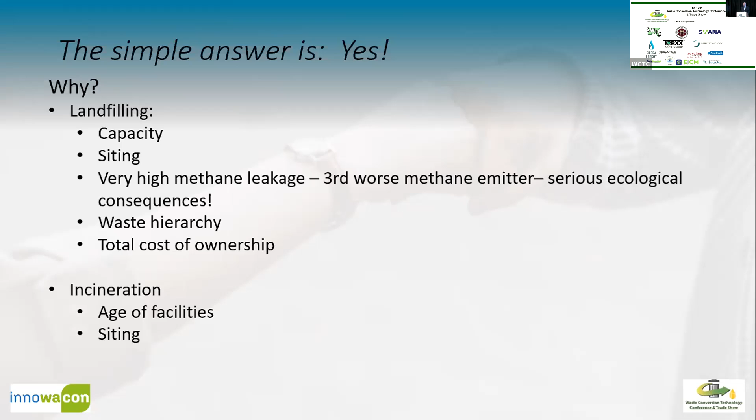Waste hierarchy, it's also down low, just above landfilling. And maybe, of course, no one wants a large stack in their backyard. I can understand that. The people in Baltimore have said, we don't want this polluter there. That's getting very subjective, finding out what's going on. People are complaining they're getting cancer. Maybe so from this, I don't know. I don't know all the facts. But if you have a polluter in there emitting a lot of things, why not get rid of it as well?

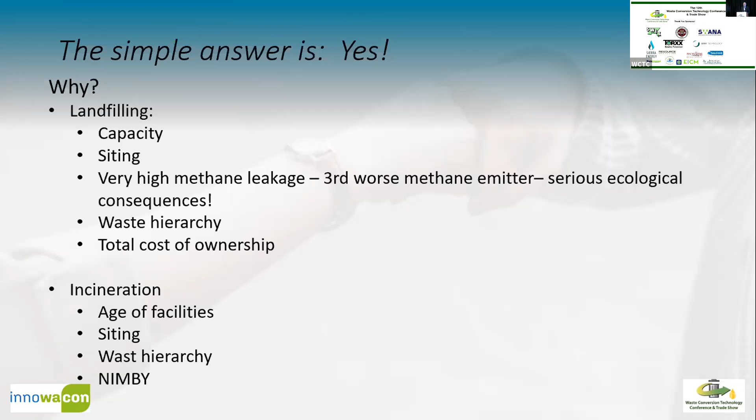If you want to try and find a tried and proven alternative out there, you have to also answer these further questions. What current sustainable, future-oriented waste treatment and recycling practice and methods are being used now? What kind of technology is available out there? And what do I do with my organics and garbage?

Okay, organics, garbage, nice juicy waste stuff. Of course, diverted from landfill. You can bring it to AD. There's some troubles in that too. We also have AD. InnoWaCon also has AD technology.

What can be landfilled? What material can be landfilled? Maybe take a look at what Germany did. And what complementary technologies can be used are available there for use. These questions have to be thoroughly addressed to come to a complete answer.

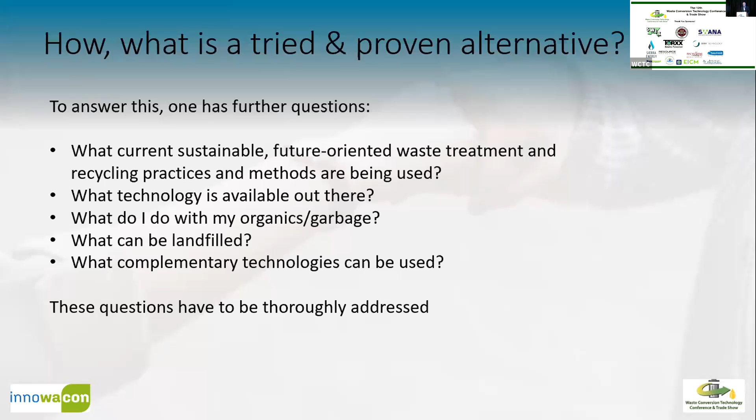Ideally, the complete solution is combining the waste collection, waste and recycling methods and centers that you have around. Just don't have a collector or a hauler out there bringing stuff to facility A, not working together or working with the community together with a hauler, with a recycling center. If you can work together, you have much better cost control of things, and things can work much more efficiently.

You have to have a sustainable waste treatment process itself out there, one that's really going to work and work for a long time. And all the products, the waste that comes off of this, you have to be able to utilize and recycle them if possible, and incorporate the complementary technologies where appropriate. Don't have to have a whole big thing that'll do everything from A to Z, but the appropriate things for your area. And it should be BAT.

Everyone know BAT? BAT means best available technology. I believe people very often say state of the art and also BAT, but I believe they're two different things. State of the art, if you look at a timeline going out into the future, state of the art, let's say it's right there. Time goes on and state of the art is still there. BAT, best available technology, makes iterations. It goes along with time. It's always improving itself and making itself better over time. So it's always looking at new things, questioning if it's still viable and workable.

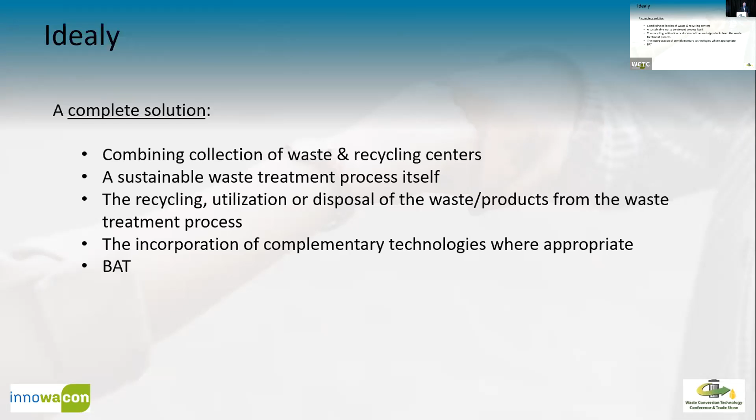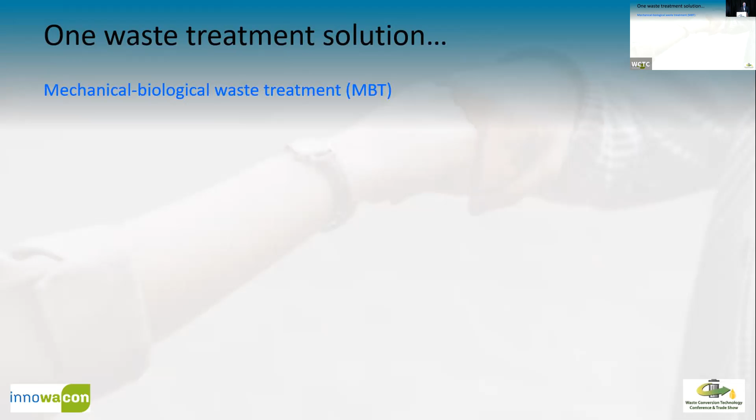One waste treatment solution that we've had is the mechanical biological waste treatment process, MBT. That exists, but they've had their own challenges and difficulties in the past. It's been shunned, yes, for some probably very good reasons. They have not addressed all the concerns that I've listed above in the last slides very often. They weren't complete systems. So I have an MBT that can do this, but it can't take everything else. But it'll do the job. We've seen that. It's difficult to control and maintain.

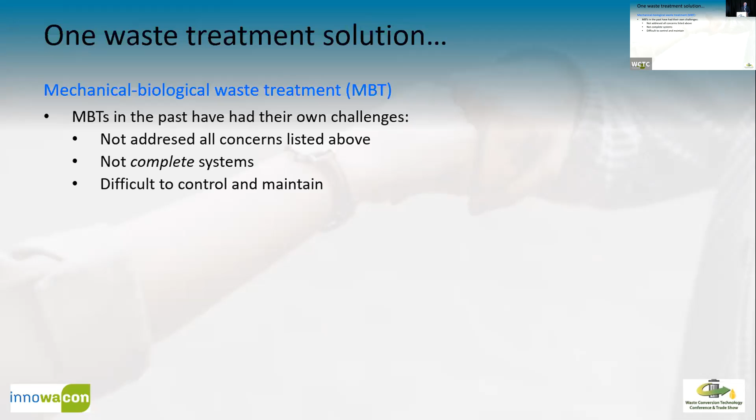There were 2 plants built in Heilbronn and Buchen in Germany with an MBT process that promised to do well and work correctly. It didn't work at all. In fact, they tried to keep the process going. Pipes were getting clogged up, all sorts of troubles. They had to take these 2 MBTs completely down, demolish them, because this process did not work at the time. And that is a major thing with the MBTs, because it's a mechanical, biological, thermal, chemical process that has to work together.

They were in the past designed and built just enough to do the job, maybe not much more. And they didn't extract the maximum energy and value out of the waste as possible. Not sustainable, couldn't keep it going. And this resulted in unreliable plants. You just couldn't keep them running. Non-availability. You want a plant that you put a lot of money into to keep on running 24/7 or whatever your shift, and these weren't doing that.

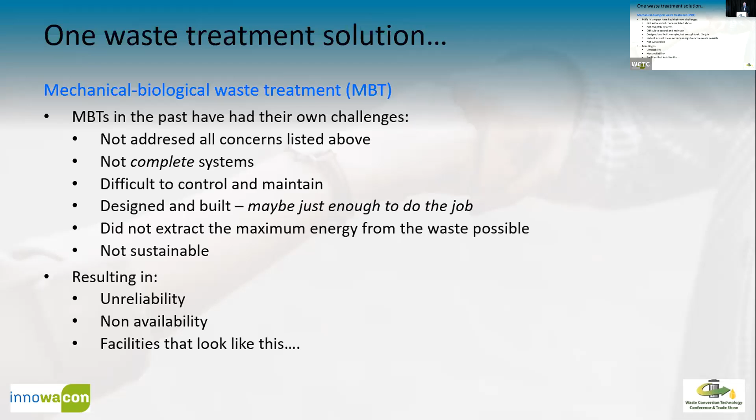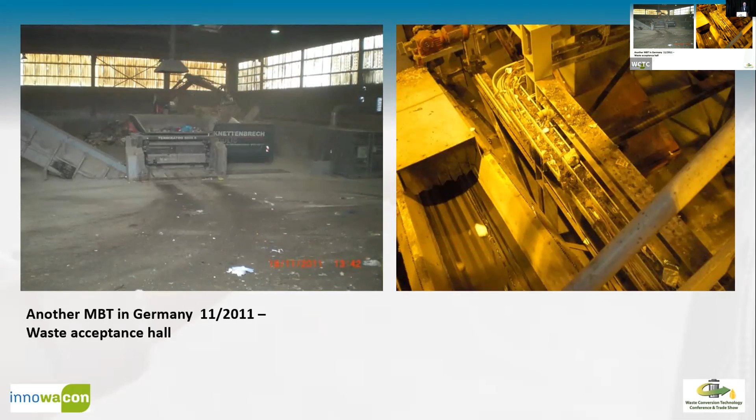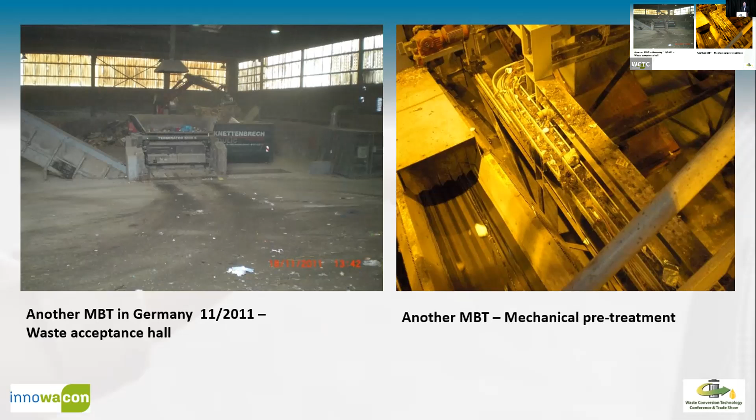On the right side picture, you're seeing the mechanical pre-treatment side of things with a transport belt on the lower left, and open cable canals, cable troughs, where dust and whatever is flying inside of them. OSHA and safety and fire safety, they're going to love this one, because that's an accident waiting for a place to happen.

Let's see if this thing works. Oh, let's go back one.

And I've seen people in similar tunnels like this, loading and unloading these tunnels. That guy was not a happy camper. He was doing it with a small front end loader, full gas mask. Because of that, he was hot and sweaty, and he wasn't happy, and he was very happy to finish shift and get home. I'm sure they have a big turnover of people there.

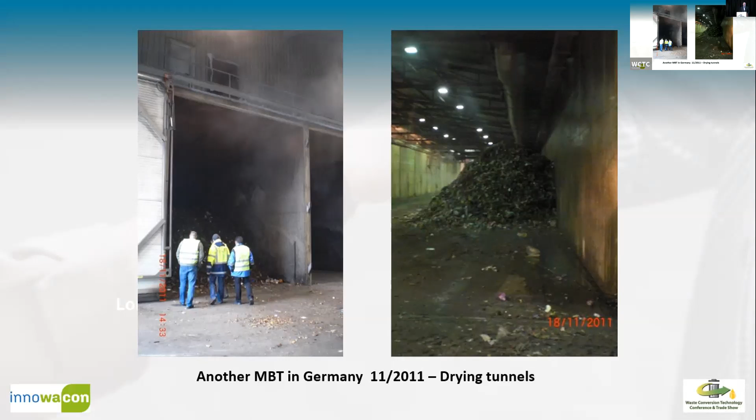The other one is also a drying area, putting the stuff away out there to dry in a pile. That's a fire hazard out there.

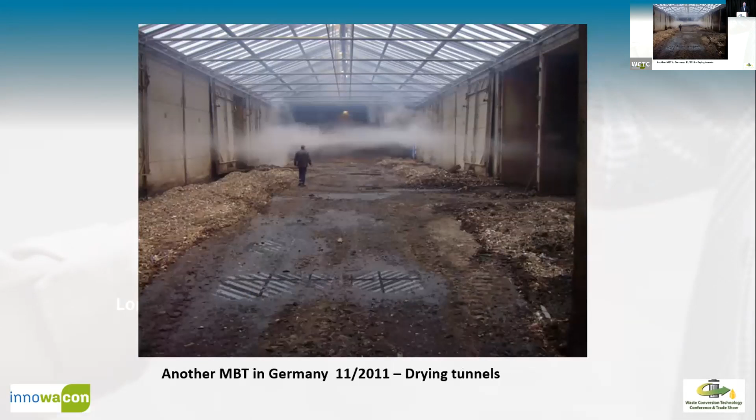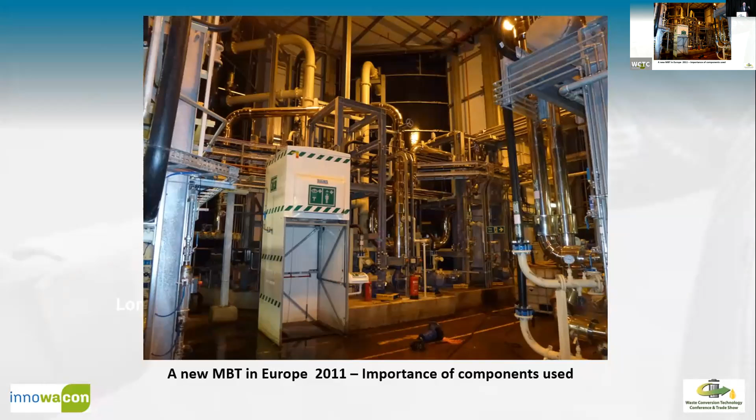Open composting with the smells. We don't have to talk about that because we've talked about that in the last couple of days.

These problems were addressed and has resulted in MYT, maximum yield technology. This is an MBT technology that has really addressed all these problems and come up with something that is sustainable. It is tried and proven.

The pictures you will see shortly are from a plant in Germany that started in 2006, ramped up from May to August 2006, taking in 100,000 tons a year, has had no downtime since then, is still operating, and they plan to go another 20 years on it. The floors inside are as clean as the floor in this room right now, except in hall 1 where the waste comes in. You'll see that in a minute.

It is a fully developed system, answering all the questions, what do we need? It is also flexible. Flexible, I mean, it is adjusted to the waste that's to come to it.

For example, this little pointer here is a product, has a certain size, certain weight, can do certain things, a few buttons, fine. The MYT is a process that is flexible to the kind of waste that you have. So it's not just, oh, we just need that, that, and that. Rather, it can take the different ones. You just have to know what kind of waste you want to bring to it.

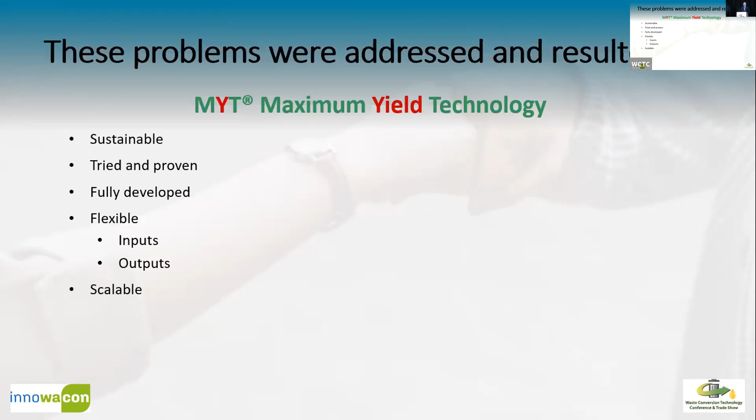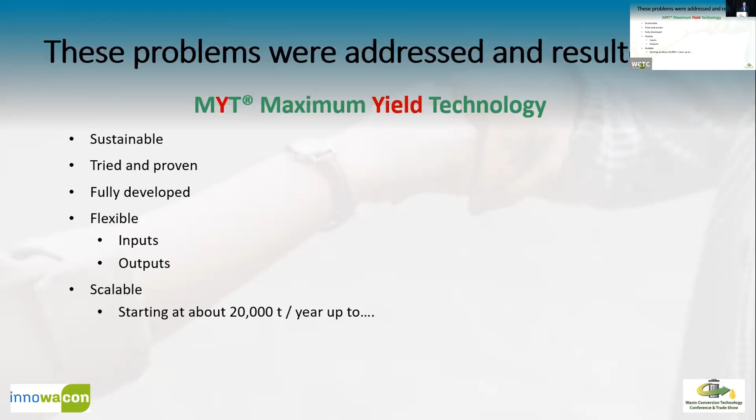It's also scalable. The minimum size is around 20,000 tons a year, and yes, we will come up to the number we heard yesterday, 300,000 tons a year is no trouble. 500, whatever you like, it can be expanded. At some point, there's economies of scale that with such a large plant, it might make sense to split it and have two plants around a city, large municipality. So in case of some problems, there's always some redundancy somewhere. Make sense of the whole thing.

It is a German technology, yes. It's available in North America now. We can have it, it can be brought over. Not the equipment, except for one piece essentially, but a lot can be bought locally, be it in US or Canada, it doesn't matter. The companies that supply pumps, material, transport belts can be qualified and bought here locally, which makes a lot of sense. Buy USA, buy in Canada, good idea.

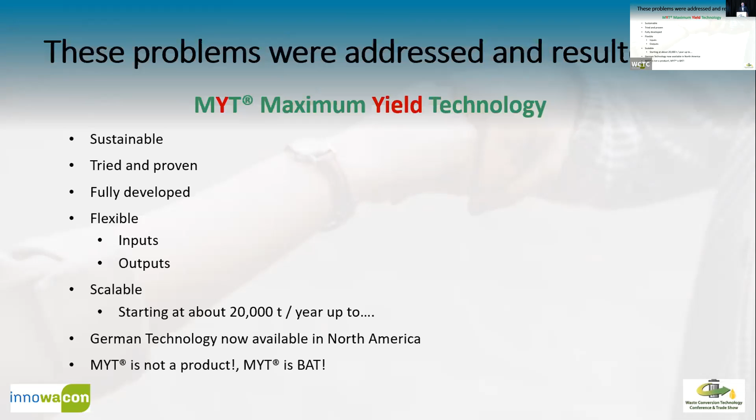MYT is not a product. MYT is BAT, best available technology now.

Let's go through the process steps. We have waste acceptance, mechanical preparation, generally 5 steps: biological conversion, biological drying step, mechanical material separation.

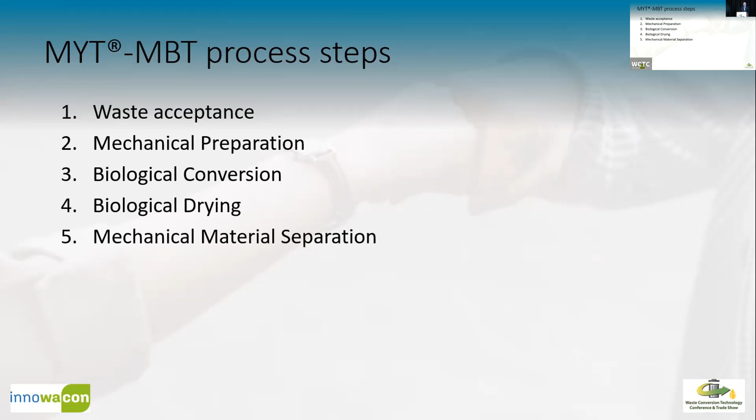Let's look at each of these in a little bit of detail. How am I doing on time?

Going from left to right, waste acceptance, where it comes in, and they first start to find out what I don't want into my system. People have been known to put everything just perfectly into the waste bins, into the bio bin as well, right? No. We found motor blocks, everything, guns, big stones, who knows what, everything can be found in the waste.

And they take out the big stuff in this section right here. Then the waste that we want goes along onto a transport belt, all enclosed. Why? We suction that air out of the enclosure. Also, the building's under negative pressure, so germs and dust and smells don't go out, rather fresh air comes in.

Enclosed as well, we suction it out, so germs, animals, let's say birds - if you have different buildings, you will see we do have different buildings on the ZAK plant in Germany. Birds, animals don't come in, and also smells and dust does not come out.

The rest of that good waste that we want goes into the mechanical pre-treatment section, where we take out different fuels, mostly RDF, a lot of plastics. And we know what we can do with plastics - we've talked about that in the last days. Minerals, meaning stone, sand, rocks, metals, and residual materials.

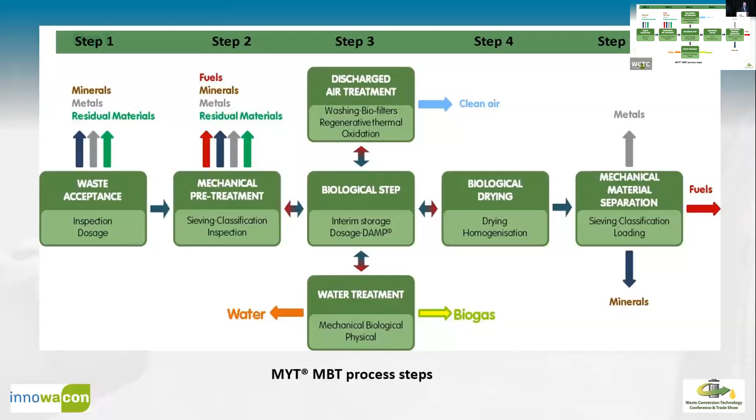Let's look at some of the inputs I mentioned about flexibility. If you look at all of Germany, this large box is the way they do it there. It was talked about yesterday whether recycling is really correct or not. Mike was very adamant about it, Mike Hart, talking about these things.

In Germany, you'll have the gray bin, the organics bin or bio bin, with your nice juicy kitchen waste. You'll have the yellow sack where recyclable materials go, all your cartons, your yogurt tins, your yogurt plastic things, the hard plastics as well.

They don't sort by 1 through 7s. They don't have that in Germany. They sort by PP, PE, etc.

There's a paper bin, very interesting, about a 240 liter paper bin. It gets picked up every 3 weeks, and the paper company gets fairly good quality paper so they can make new paper, new cardboard out of it, used paper.

In town you'll also find a glass bin where you can put your wine bottles and other recyclable bottles that you don't reuse. There's also a lot of reusable bottles in Germany. Maybe we can get back to that. Who remembers in the States the beer bottles from Schlitz or Pabst, where pints come in and they're reusable?

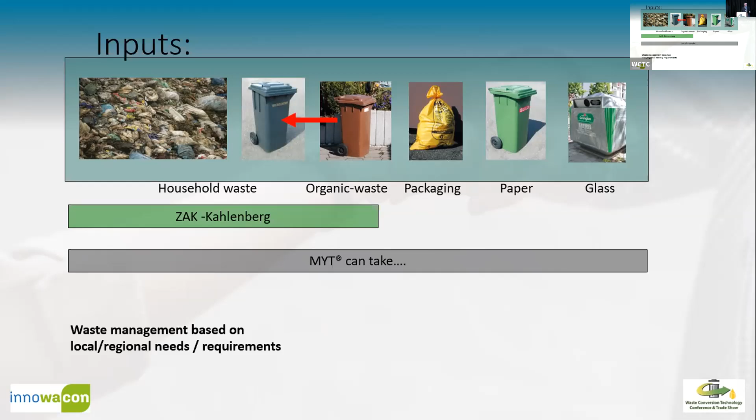Mechanical pretreatment hall, it really looks like this. It's cleaned every day, and the young guys are taking care of this hall.

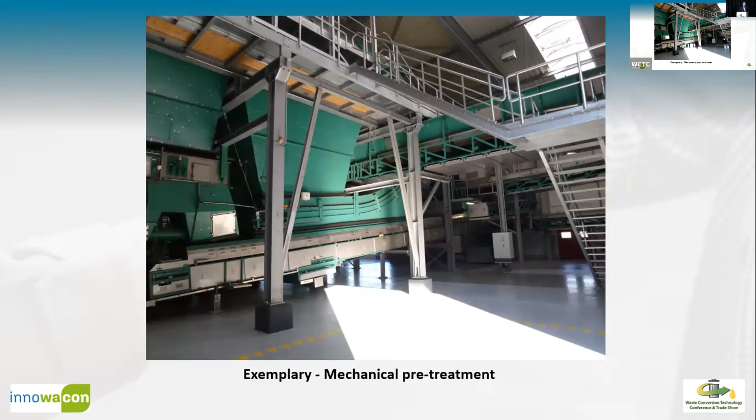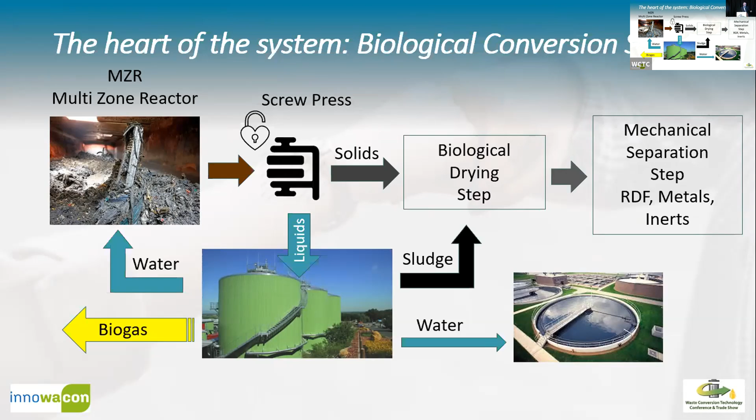Biological drying, the tunnels are on the other side, I didn't show them, but there's a tunnel extraction device that goes onto it.

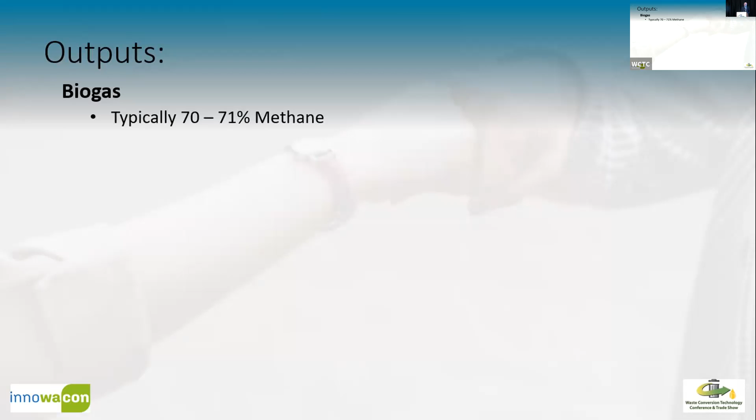Mechanical material separation area. The outputs are biogas, typically 70 to 71% methane content. Use it correctly. Uniform production of CH4 is very important - it's not spiked like that. It's around 7% of the original input, so we get 7,000 tons from the 100,000 tons we get at the ZAK plant.

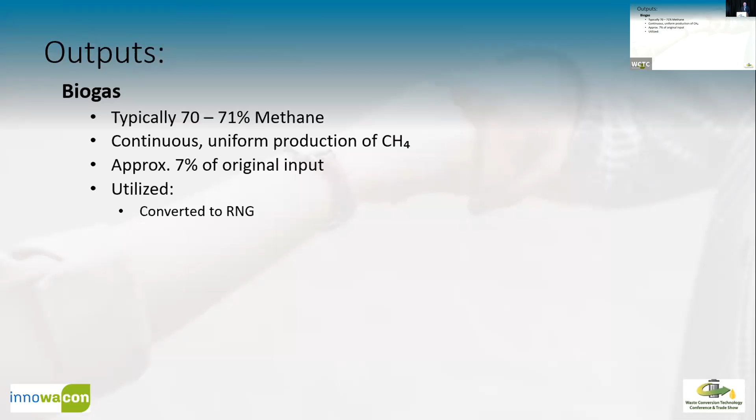Utilized, converted to RNG, converted to diesel, SAF, sustainable aviation fuel. It's all possible these days with complementary technologies. Also green hydrogen - I venture to say it's green hydrogen, not gray, but we can discuss that. And thermally for electricity and heat, so you can burn it in a CHP.

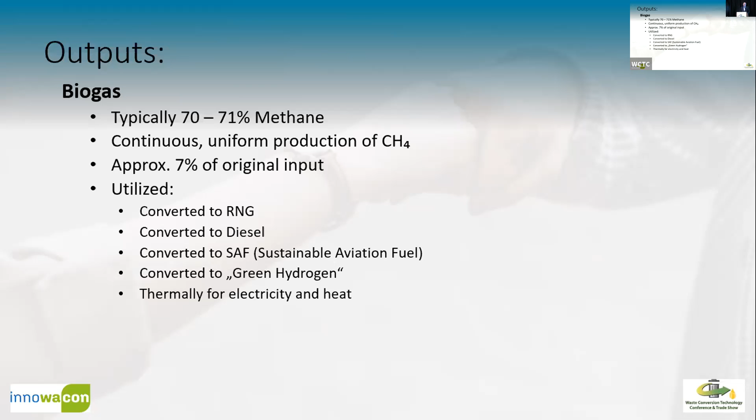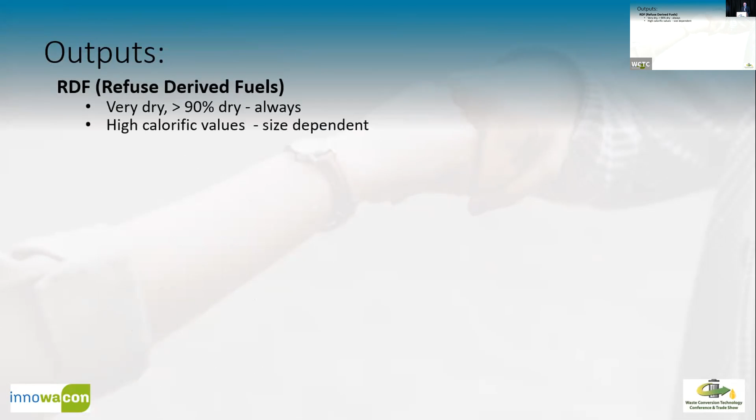The outputs, the RDF, refuse-derived fuels, very dry, 90%, and it's always that way. High calorific values, size dependent, around 9,000 to 22,000 kilojoules per kilogram, or if my math is right, 3,900 to 9,500 BTUs per pound.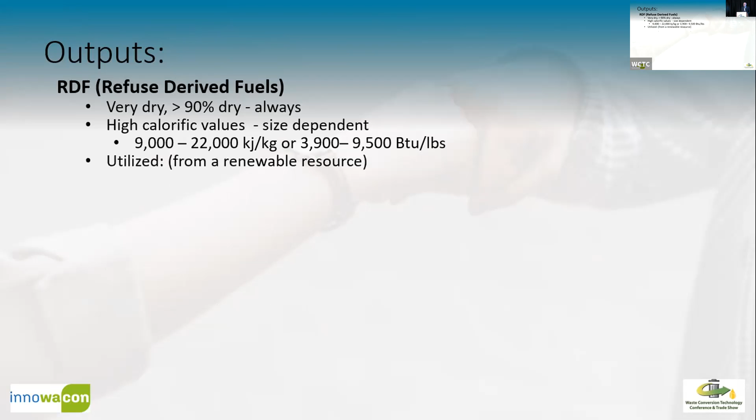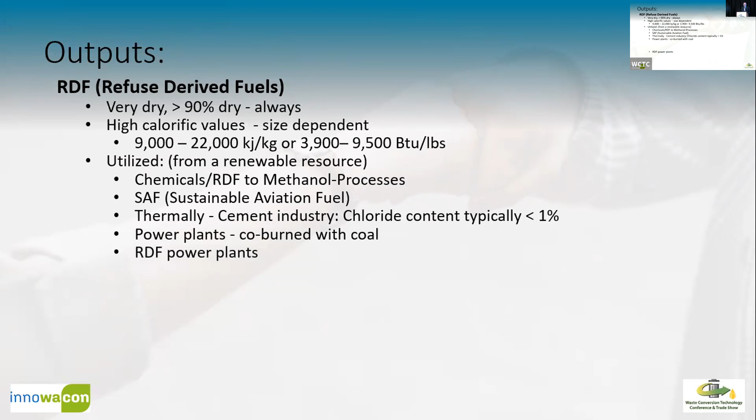Utilized as a renewable resource in chemicals, RDF to methane processes, methanol process sorry, SAF sustainable aviation fuels. Thermally, in the cement industry they like it because the chlorides are low, lower than 1%. Power plants can co-burn it with coal, though maybe that'll be going away in a little bit. RDF power plants as well.

But please do not landfill - this stuff is too good to bury. Why landfill energy? Why landfill a resource? And they're doing that with MSW right now, landfilling a wonderful resource.

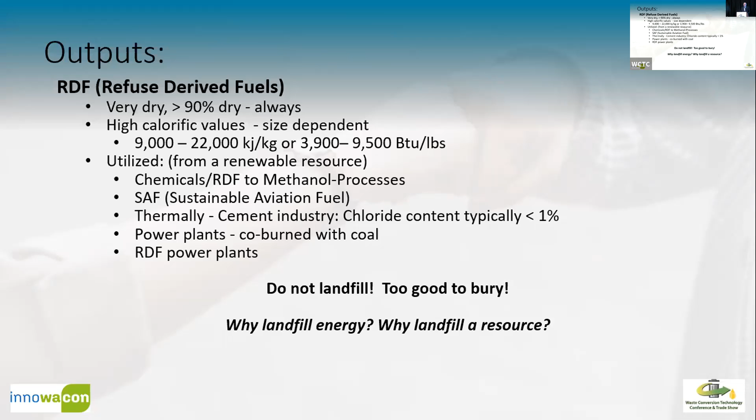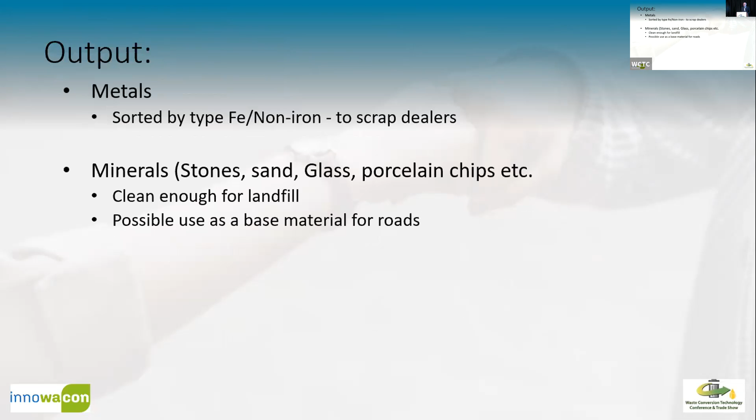Outputs are also metals, sorted by type, sold to scrap dealers. There's mineral stones, sand, and glass - they're clean enough to landfill, or as I said, you can also use them on roads. The glass you can also sort by color and bring it back, as we talked before, into the circular economy.

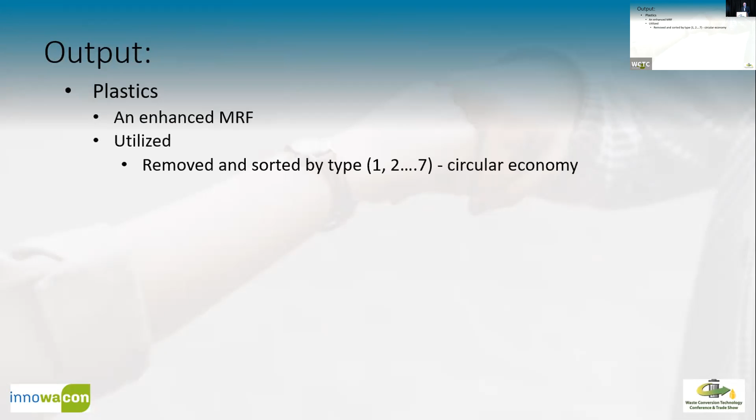There are plastics - we talked about that yesterday quite a bit. Yes, it is an enhanced MRF, does a lot more, takes it a lot further and completes the whole equation. They can be utilized and sorted by type into the circular economy, making new quality pellets, or thermally utilized to burn.

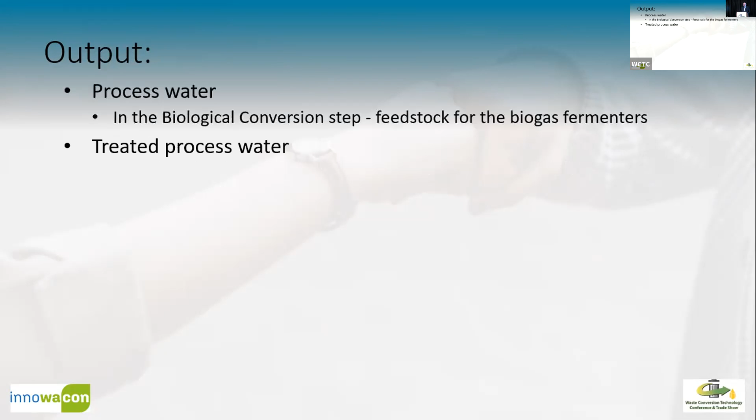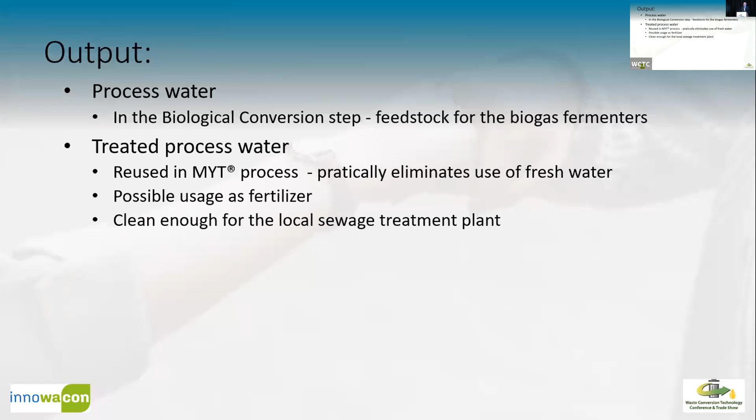The processed water is in the biological conversion step and brought to the biogas fermenters. The treated processed water is reused in the process, in the MYT process, and does not use fresh water - I think more fresh water is used in the toilets at the plant than in the system. It can possibly be used as fertilizer and brought out into arid lands especially, and it's clean enough for the local sewage treatment plant to take on. It can also be used in the chemicals-to-methanol processes as the water source and other things.

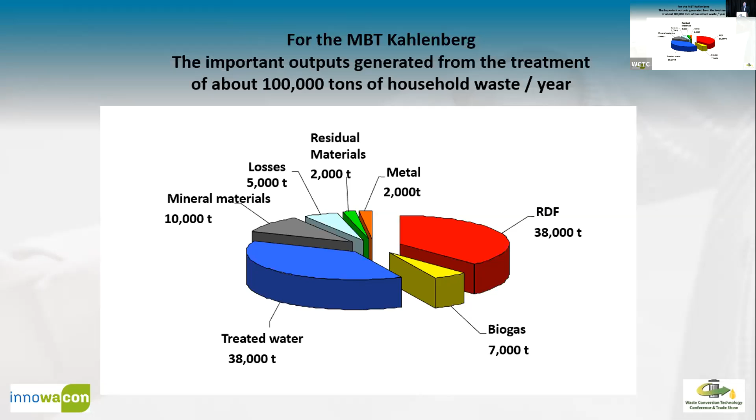Here's a breakdown of the 100,000 tons a year that the ZAK plant in Germany gets. It might be different for another plant that'd be built, but similar.

Cost to the citizens is very low. Let me put a number to that: for a 4-person household in the Ortenau County in Germany, where I was living, it's 91 euros, or about 110 bucks a year, for the complete service - collection, processing at the plant, all the administrative paper pushers, the 20-odd recycling centers in the county. $110 a year, and people get that bill once a year and pay that.

What's very interesting is people are very conscious of what they're paying. And if they know what it is, they're going to ask, what do I have to do to pay less? Well, maybe recycle or make less waste, which is a good idea anyway for the whole environment and economy. I know some waste haulers and large companies don't want to hear that because they like to make money off the waste - that's their job to do so, correct. But generally making less waste is much, much better.

And you're motivated, as I said, to create less waste.

We have some reference facilities: the one in ZAK, the Zweckverband Abfallbehandlung Kahlenberg - that's what it means - in Ringsheim, Germany, 100,000 tons a year since 2006. SYMEVAD in Hénin-Beaumont, France, 86,000 tons since 2015, all running. In China there's a small one that's been built. In Onnut, Bangkok, Thailand, 300,000 tons a year since 2019, running very well - and the Thai waste is 70% wet, it flows out of the trucks. We designed it to fit that waste.

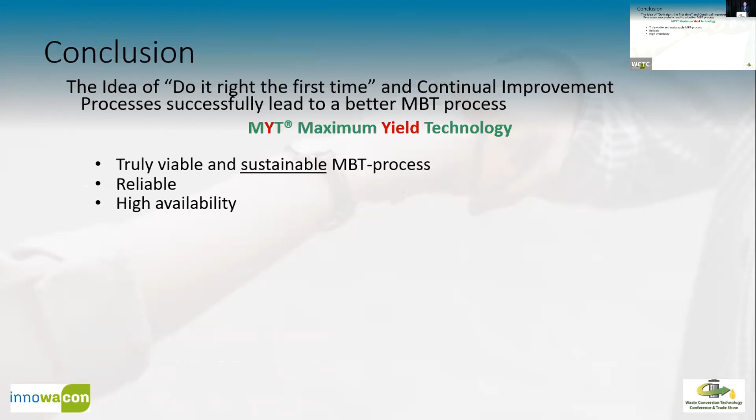It is reliable. High availability means it's working for you all the time. We don't have any two weeks of revision or renovation time in the year. We do it maybe over the weekend. It is flexible, as we talked about, adaptable, and scalable to different sizes.

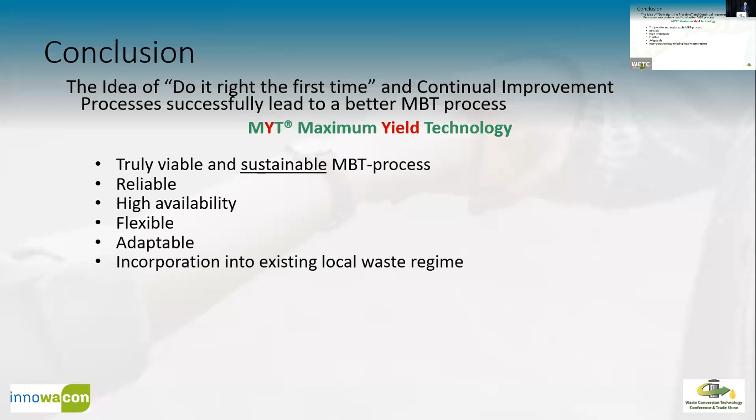It can be incorporated into the local waste regime you have now. You don't have to change everything up front to make this thing work. It is a safe and clean workplace, important these days. The regulations, wherever they are, can be upheld, and that's very important. Design it according also to the regulations that you have.

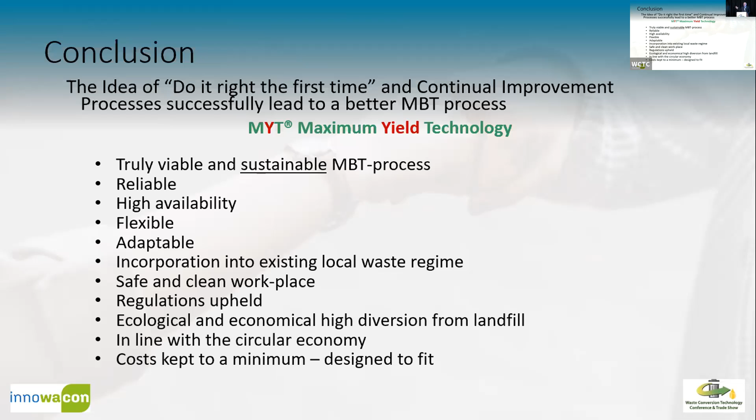And a high diversion from landfill, which everyone, not only California, wants, in line with the circular economy. And costs are kept to the minimum. It's designed to fit, not too big, not too small. Thank you very much.

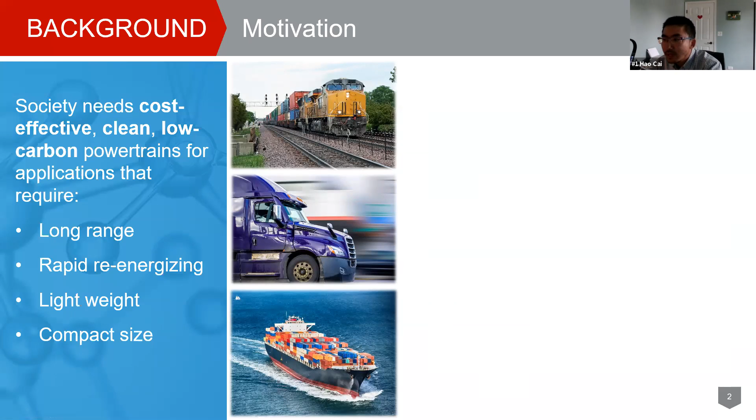So for some of you who may have known the Co-Optima program under DOE, it has been running for about 6 years now. The first 3-4 years focused on developing fuel technology and engine technology for light-duty vehicles. In the recent couple of years, we have been switching gears to look at fuel and engine technologies for the heavy-duty vehicle technologies.

So the overall objective of Co-Optima is to develop cost-effective fuel technologies that could be produced from alternative feedstock, other than fossil feedstock in a conventional way, and therefore offer low carbon performance and hopefully performance-enhancing or engine efficiency-enhancing properties for light-duty vehicles, or emission reduction benefits for heavy-duty vehicles.

So here I'm focusing on the work looking at alternative renewable diesel fuel that could be produced from wet waste feedstocks, again for heavy-duty vehicles, coupled with some Co-Optima engine technologies such as ducted fuel injection technologies, that could tremendously reduce the engine out NOx emissions or particulate matter emissions, which are conventionally critical challenges for heavy-duty engines because of the stringent emission standards in the US and across the globe.

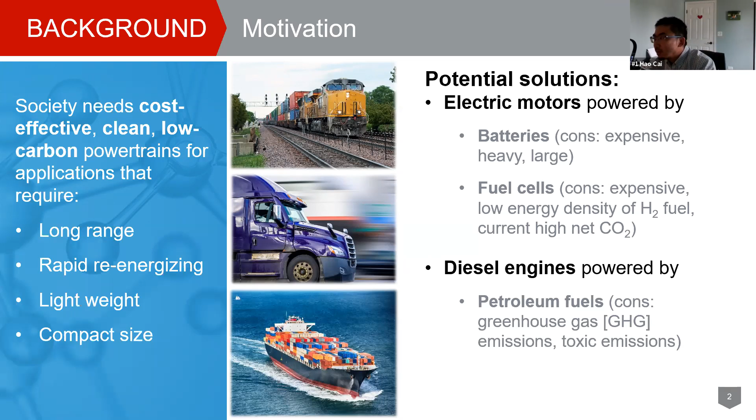So here, again, we have been exploring different feedstock types or resources that could be used to produce hydrocarbon drop-in renewable fuels, including renewable gasoline and renewable diesel fuels. Here I'm going to focus on the effort to look at some of the waste resources out there in the US to produce functionally fungible fuel that could be blended with conventional petroleum diesel fuel in the refinery or for co-processing.

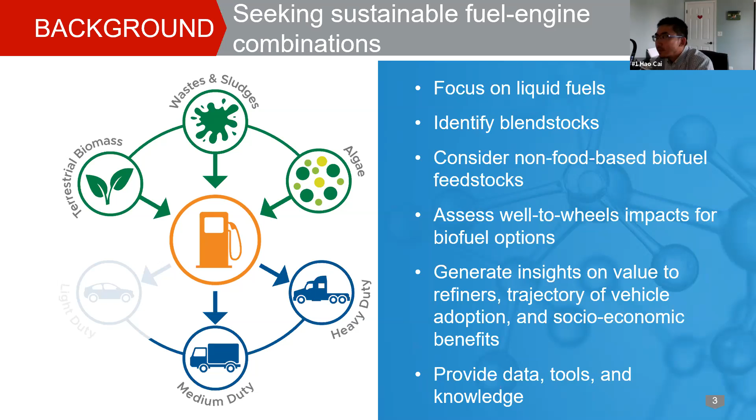And we are here to produce some life cycle analysis to inform the R&D through both life cycle analysis and techno-economic analysis, which has been done by some partners from other national labs, including National Renewable Energy Lab and Pacific Northwest National Lab.

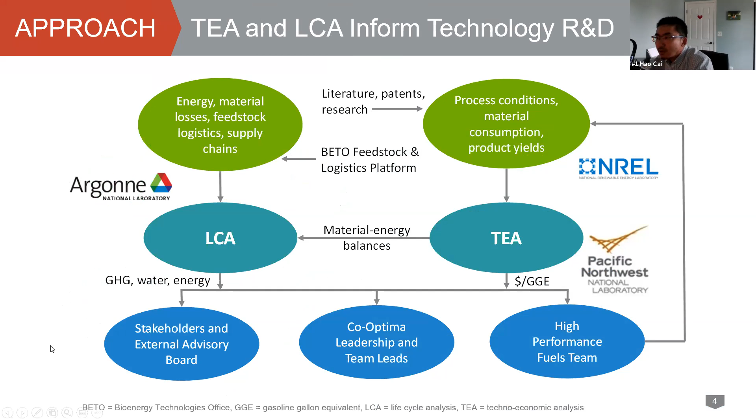I was going to focus our work on the life cycle analysis here. And at this moment, we have just submitted this work to a journal article. So hopefully in the not so distant future, we could have this work published in the public domain.

In this particular analysis, we have been looking at initially a wide range of wet waste feedstocks out there in the US, based upon some resource assessment studies conducted by our NREL colleague.

And here we are focusing on two types of wet waste feedstocks, including animal manure, in particular swine manure in this particular analysis, and the other one is yellow grease, based upon the feedstock availability as well as the potential to produce renewable energy from these waste feedstocks.

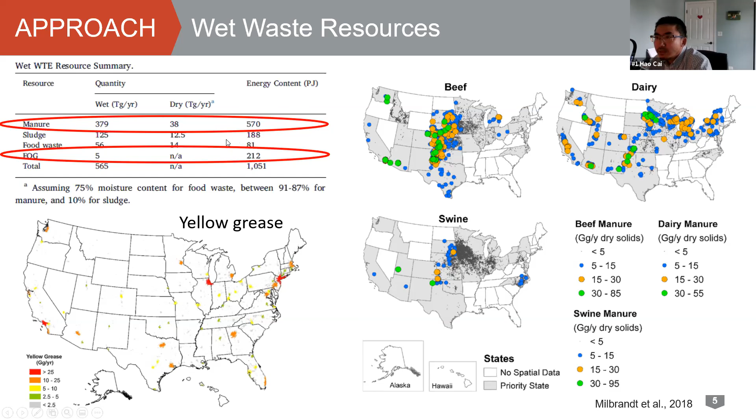The first technology we have been evaluating here utilizes yellow grease as a feedstock, which goes through hydrogenation, hydrocracking, hydroisomerization, or the entire HEFA process, to produce intermediates such as alkanes and isomers that could be hydrotreated and converted into a range of renewable hydrocarbon fuels, including renewable diesel.

So we have been looking at the resource availability to size the biorefinery in our modeling work. We have also tried to look at the potential impact of the feedstock composition on the conversion performance. And also, from both the economical and environmental analysis standpoint, we vary the size of the plants to look at the impact on sustainability and cost performance.

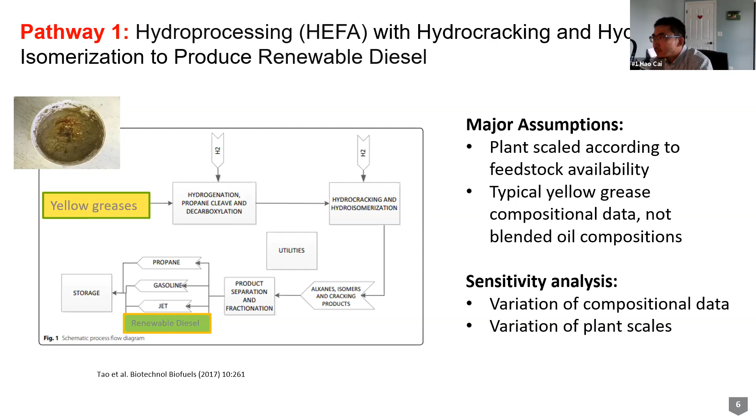The second technology we look at here is to produce renewable diesel fuel with swine manure that could go through hydrothermal liquefaction, or HTL technology, to produce renewable drop-in diesel fuel. With this technology, we have been focusing on the potential benefit of generating a high yield of biocrude through the HTL process, which could account for about 50% of the carbon conversion efficiency.

This HTL biocrude could be converted to diesel fuel through a subsequent hydrotreating process. And overall, the diesel could account for about 60% or more, which presents a good renewable diesel yield through this technology.

And on the quality side, this HTL pathway could produce high cetane diesel fuel, among other favorable properties, that could enable reducing engine out air pollutant emissions, coupled with all the Co-Optima technology, as I mentioned, for example, ducted fuel injection technology.

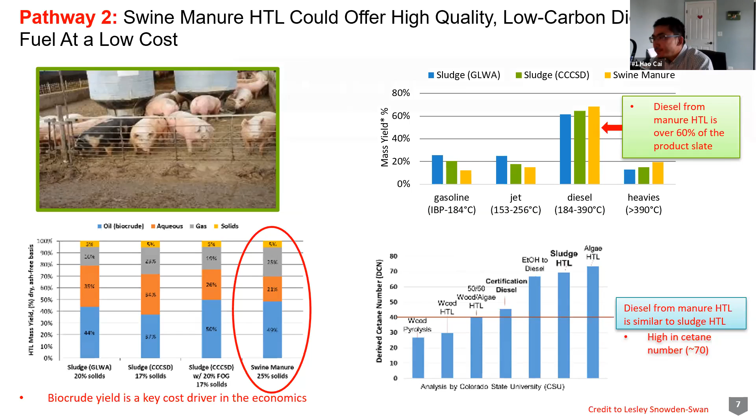For this particular one, here is the system boundary or scope of the LCA analysis, where we look at a decoupled HTL plant that's assumed to take about 110 dry tons per day of swine manure and convert that to biocrude. The biocrude will go through a hydrotreating upgrading process to produce the finished product.

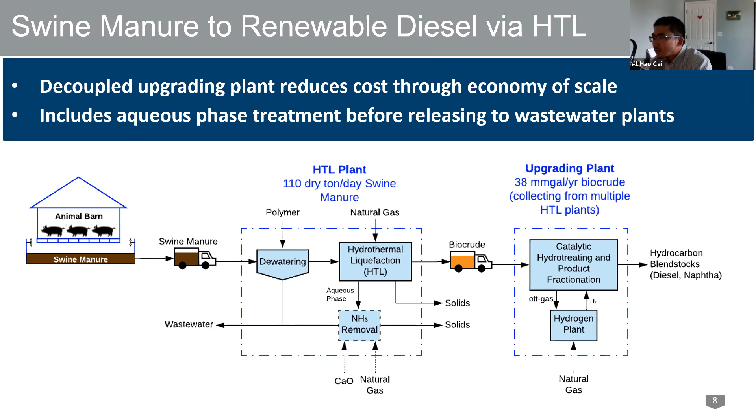Here is what we considered in our life cycle analysis, which highlighted two major supply chains. One represents the conventional waste management practices, which we call the business-as-usual counterfactual scenario. This is avoided since the waste would be diverted from business-as-usual practices to the bioenergy production scenario, and we account for what would be avoided or foregone because of this diversion.

In the bioenergy production supply chain, we start by looking at waste collection and transportation, then going through the conversion process at the biorefinery to produce a renewable diesel fuel.

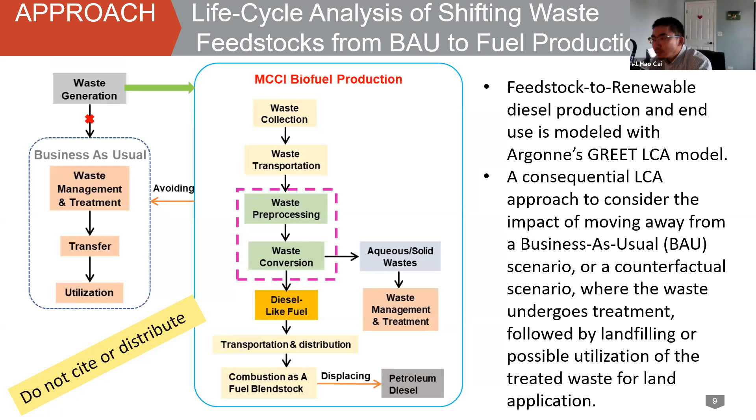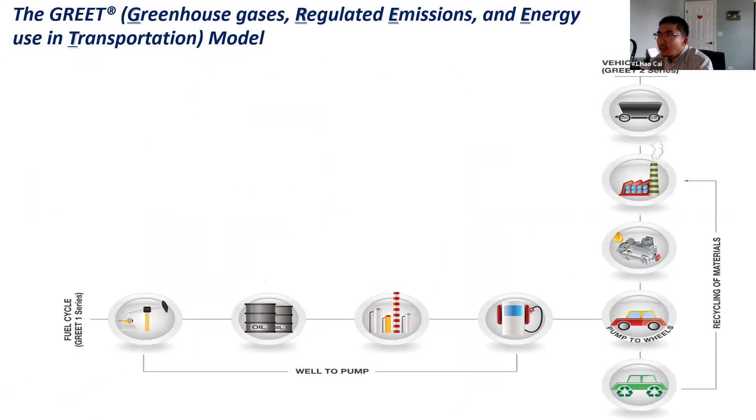The analysis work is done using the Greenhouse gas, Regulated Emissions, and Energy use in Transportation model, known as the GREET model, which we developed at Argonne National Lab with support from multiple transportation offices of EERE, DOE, over the past two decades. Here we utilize mostly the fuel cycle GREET 1 model to do the well-to-wheels life cycle analysis.

With this effort and other parallel waste-to-energy, waste-to-product life cycle analyses we've been doing in our group, we are developing a new waste management and waste-to-energy, waste-to-product module within the GREET model, which will be incorporated into the upcoming new version of GREET coming out in a couple months.

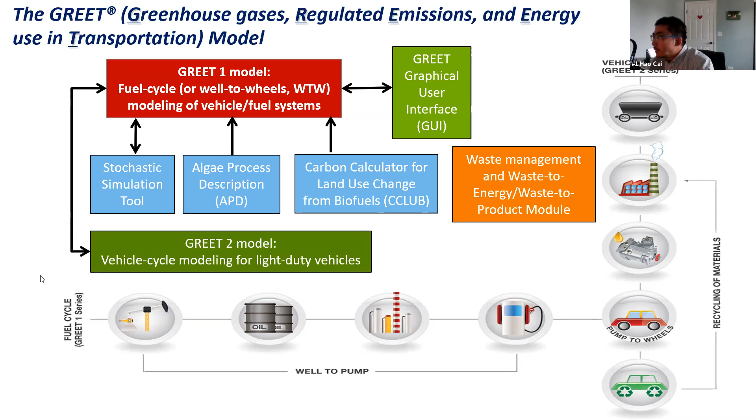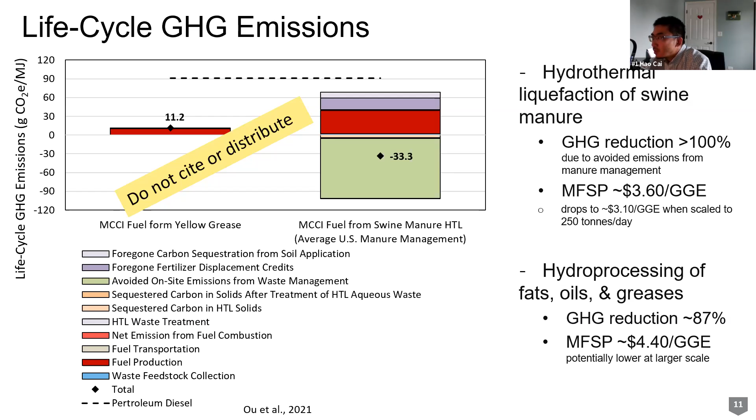And if we could scale it up to about 250 tons per day, the estimate through our process modeling and TEA work suggests the minimum fuel selling price could drop to about $3.10 per GGE.

We also conducted some sensitivity analysis to understand the key drivers for the carbon intensity of the fuels, taking swine manure as an example. There are two major things we evaluate here. One is the impact of feedstock quality, looking at ash content and solid content, and how they impact the overall carbon intensity.

Higher ash content could actually penalize the carbon intensity because it reduces how much methane emissions could have been avoided. The high ash content lowers the biofuel yield, which eventually increases the carbon intensity. The same could be said for the other quality attributes of the feedstock, such as solid content, for similar reasons.

At the same time, we look at the impact of conversion performance, especially the conversion yield at both the HTL plant and eventually the hydrotreating step. The impact here is a little counterintuitive: basically, the higher the conversion yield or efficiency, the higher the carbon intensity for this particular case.

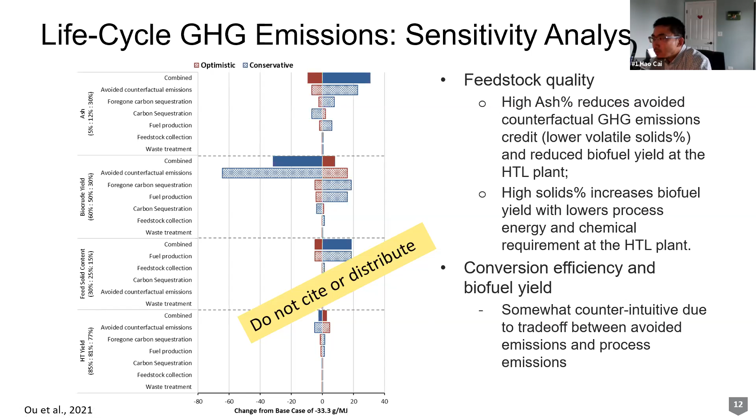We also look at a couple of alternative counterfactual scenarios that could be considered as possible for swine manure, other than the traditional AD process followed by landfill or soil application route that we consider in the base case. We also look at another case where the biogas during the conventional AD, landfill and land application process, which generates a lot of methane emissions, gets flared instead. This results in somewhat increased carbon intensity compared to the base case, solely attributed to a reduced amount of the avoided methane emission credit.

The other sensitivity case we look at is if the manure goes through the AD process for power generation, and that power could displace or get exported to the grid, displacing conventional electricity grid generation in the US. This represents essentially a competing technology to shifting the swine manure for renewable diesel production. In this case, we look at the foregone electricity displacement credit from using the AD biogas for power generation.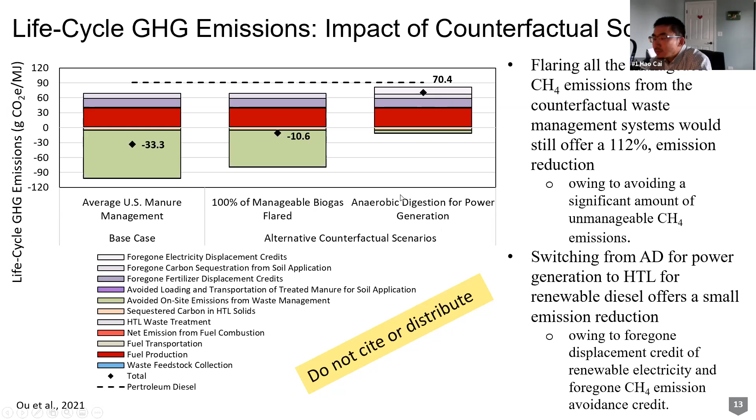With both the TEA and LCA results, we looked at another dimension of the technology by assessing the marginal GHG emission abatement cost, or MAC, for both technologies. For swine manure via the hydrothermal liquefaction route, we estimated the MAC to be around $5 to $103 per ton of CO2 emission equivalent reduction, which varies as a function of the fuel price of conventional diesel fuel, and also depends on how we assume the counterfactual scenario impact, which affects the carbon intensity of this technology, as well as plant size, potential economies of scale, and other conversion performances.

This can compare to the cellulosic ethanol technology, which was estimated to have about $48 to $375 per ton of greenhouse gas emission reduction at the current cellulosic ethanol production technology and their carbon intensity.

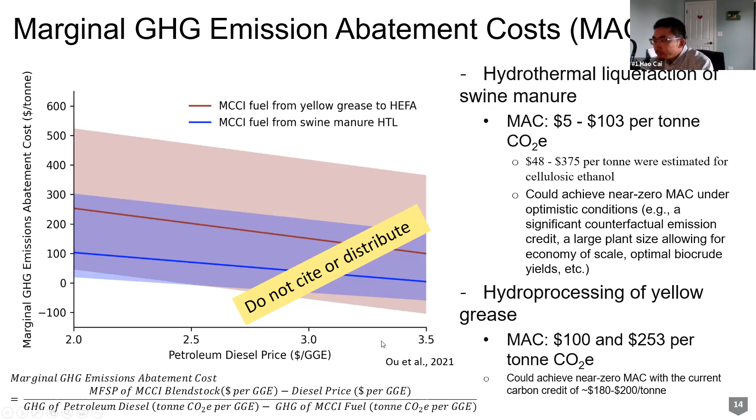We also generate results for fossil energy and NOx emissions. Generally, the benefit of fossil energy reduction is much smaller, for example, for the manure HTL pathway, which does not get much benefit from avoiding the counterfactual scenario consequences, as we do see from the GHG emission analysis.

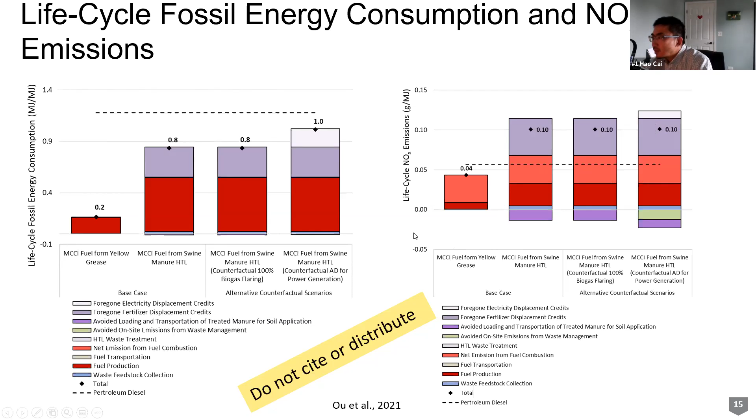For NOx emissions, we see the swine manure pathway could actually exceed the performance of petroleum diesel, mostly as a combination of fuel combustion, fuel production, as well as some avoided or foregone emission credits in the counterfactual scenario. Here is a comparison of some of the broader metrics we developed for the Co-Optima fuels, looking at technological readiness levels, economic viability, and environmental performance.

So overall, these two waste conversion technologies are pretty promising, despite some challenges. For example, some testing or certification procedures still need to be completed, and there's some scalability issue because of the availability of the waste feedstock.

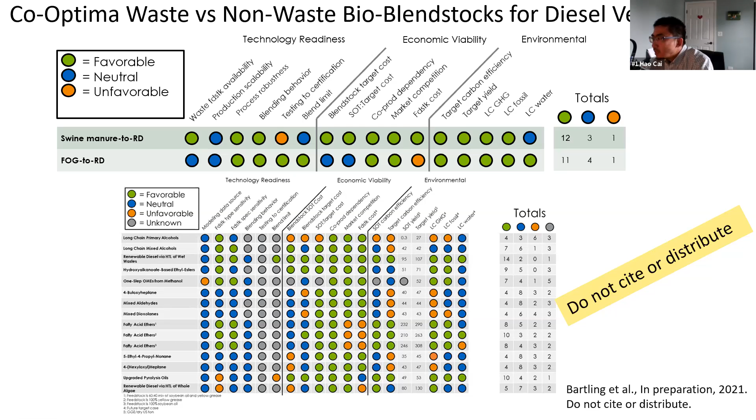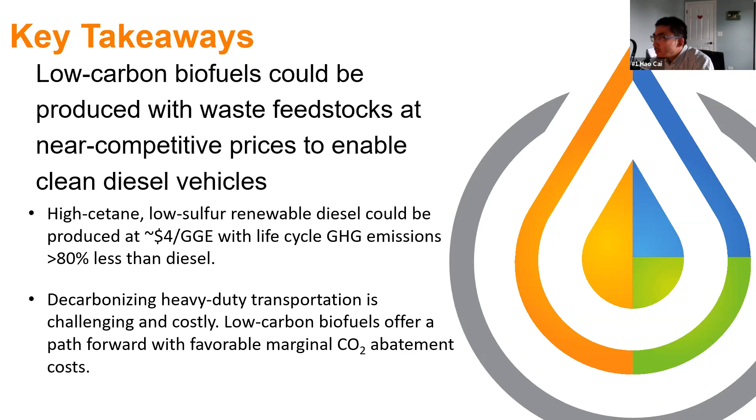So the key takeaway here is that through this LCA and the companion TEA, we found that low carbon fuels could be produced from waste feedstocks at near competitive prices, which could be used for diesel vehicles. Despite the challenge of decarbonizing the heavy-duty transportation sector, such low carbon fuels could offer a path forward to achieve this goal with favorable marginal emission abatement cost.

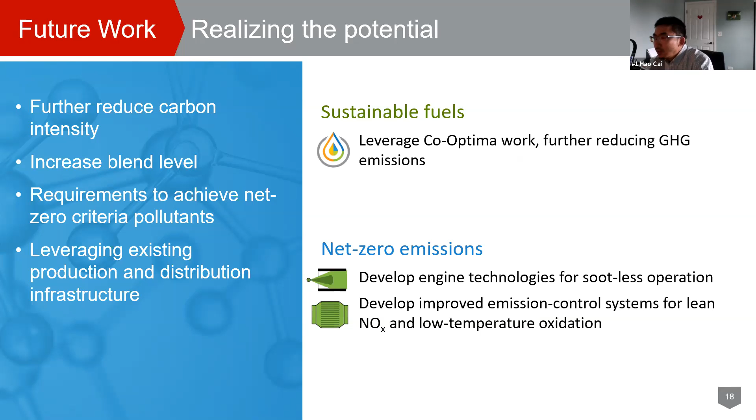Finally, I would like to mention that the work is ongoing and getting wrapped up for Co-Optima, but there are other ongoing DOE programs looking at, for example, sustainable aviation fuel and marine fuel that could be produced with waste feedstock, including wet waste, waste CO2, and MSW. So there's still a lot of ongoing effort looking at the broader waste to energy space at this moment.